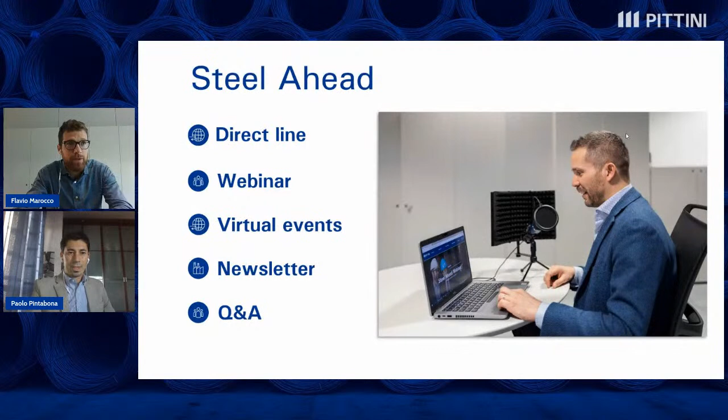Hi Flavio, and welcome everyone. Of course, with pleasure. Pittarc is the brand of welding wires produced by SEAT since 1972, a historic company of the Pittini Group, with about 80 employees working in the welding division, a turnover of 50 million euro per year, and a production of about 30,000 tons of consumables for GMAW and SAW processes.

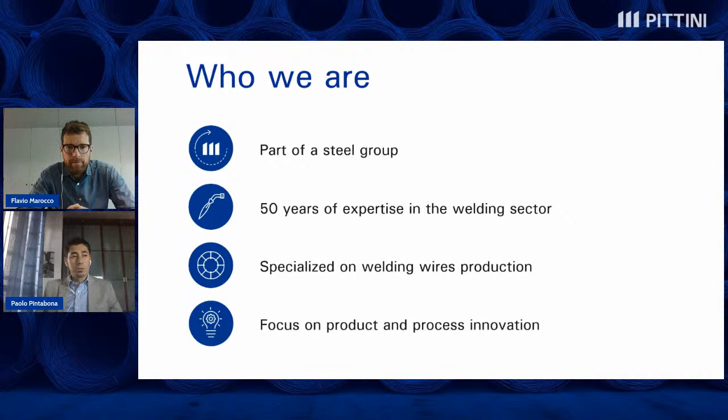In the Gemona del Friuli plant, we produce gas-shielded and submerged arc welding wires, which are the result of a production cycle that is controlled very carefully throughout all its phases, from the steel mill to the finished product.

To sum up, the production process requires the use of low-carbon wire rods, which are obtained from the billets manufactured in the rolling mills of the group. As a first step, the wire rod goes through a double cleaning process at the beginning of Pittarc production: starting with mechanical descaling, then chemical pickling by sulfuric acid, and then rinsing.

The manufacturing process starts from a 5.5 millimeter wire rod, and it is reduced to an intermediate diameter by the first drawing machine with dry chemical soaps, which help improve the cleaning and also the drawing speed.

Then an additional reduction is made up to the end diameter by the second drawing machine, using this time wet chemical soaps, before the possible copper coating at the end of the production line.

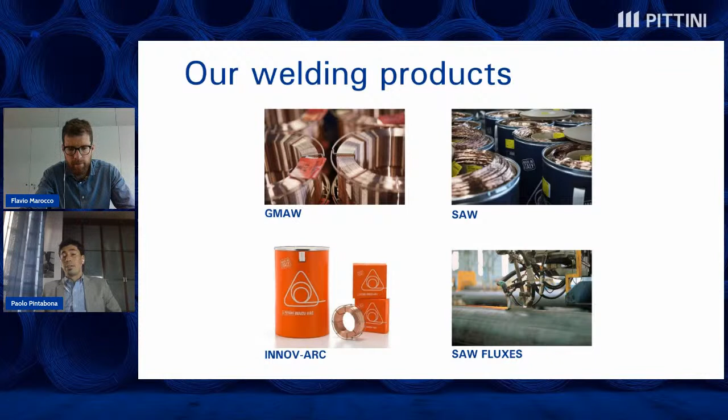Pittarc products are duly subject to strict checks of chemical, mechanical, and technological properties. They have the CE mark, and furthermore they have got the most important approvals from the main certification bodies, such as the Italian Registro Italiano Navale, the American Bureau of Shipping, the Dutch DNV, Bureau Veritas, Lloyd's Register, and the German TÜV, Germanischer Lloyd, and Deutsche Bahn.

Thanks to what has just been described, we can say that Pittarc has been present on the market as a brand leader for half a century, serving companies from over 50 countries in many different sectors, such as automotive, construction machinery, the agricultural sector, processing of metal sheet and pipe, and of course all kinds of metal work.

Okay, thank you very much for this brief introduction about Pittarc. You mentioned that you are part of a group, the Pittini Group, as a steel group. I want to know a little bit more about which kind of advantages you have from being part of this group.

Well, it's easy to say that of course there are many advantages. First of all, the synergy with the other companies belonging to the Pittini Group helps develop technology and plants of the latest generation. For this reason, we can supply high-quality products that can meet market demand, also in the most challenging applications.

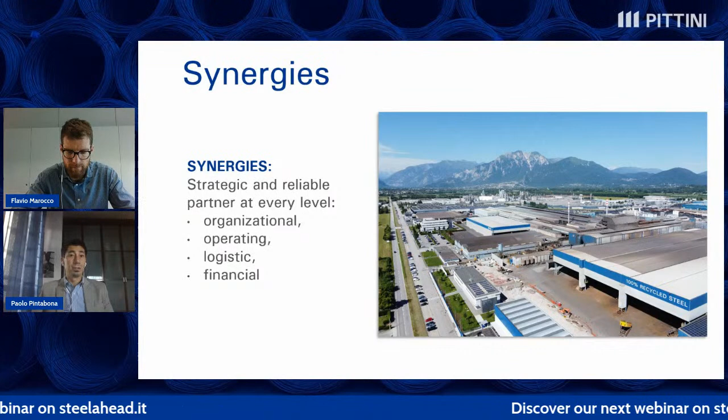Therefore, also from this point of view, the combination of the activities made in different labs and also the work between the different departments involved are made possible just by the intra-group synergies.

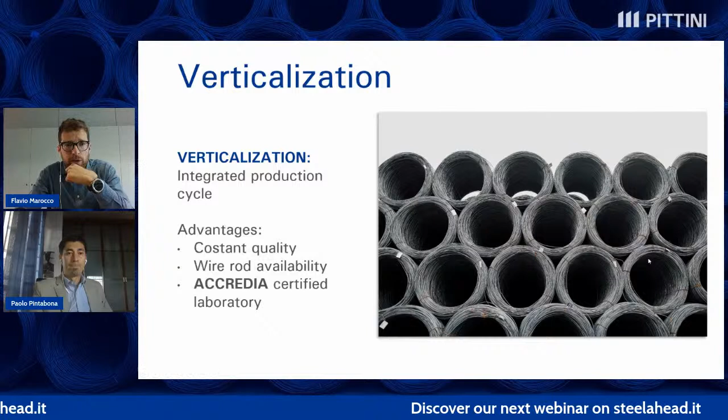So thank you very much about this. I will ask you to go directly on the topic of today's webinar. So let's speak about this collaboration with KTM. I want to know how it started and how it developed over the years.

Yes, thanks for the question. So Pittarc and KTM have been cooperating for almost 30 years through the representation of our distributor, Mr. Simon Wolfgang, a historical partner of Pittarc, with whom we always work with passion and constant commitment, making Pittarc welding wires well known and appreciated also by other important Austrian companies.

Speaking about KTM, the first supply is dated back to 1992, when at that time about 6,000 motorcycles were produced per year. Taking into account that about 0.33 kg of solid wires are used for each welded frame, the first supply was 2 tons over the whole year.

After then, KTM has had an exponential growth, from the 150 employees who made up the entire workforce in the Austrian plant, it has become a company structure counting on, for the first time, more than 2,000 employees in 2014, and able to produce in the following years more than 250,000 frames per year.

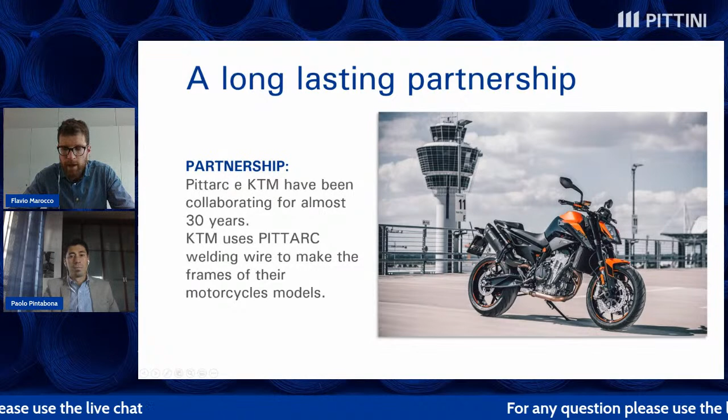Great, so a long story of collaboration between you two. But in specific, which kind of welding wires do you sell to KTM and are they using in production?

Well, let's start saying that in the plant area of Upper Austria, there is the welding division of Munderfing, having 28 workstations. Hence, the material that is mostly used is the Pittarc G6, so the SG2, in 250 kg drums as packaging and 0.8 millimeter as diameter.

Pittarc drums are placed in the dedicated spaces inside the robotic station, and the tubes that will shape the frame are fixed on a platform, which automatically turns up to 180 degrees, allowing in this way the robotic arm to carry out the automatic welding.

Once this phase is done, the manual welds are made by the operators, who in this case use the Pittarc G6 in 18 kilo spools with a diameter of 1.0 millimeter to complete the work with the necessary last tack welding. Our material is also very appreciated

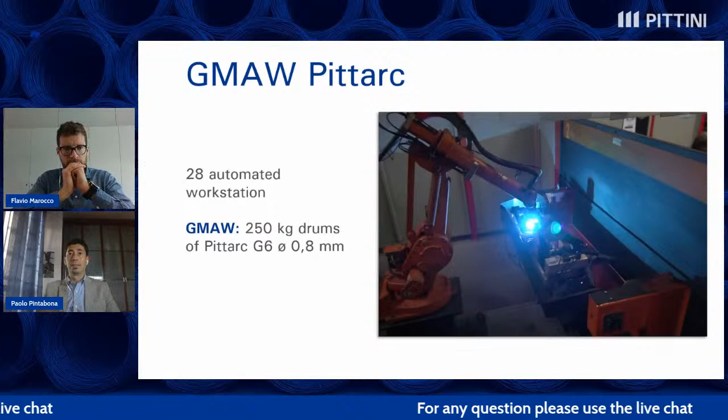in the welding process adopted at KTM, and I'm talking about the CMT, cold metal transfer, which is the innovative MIG welding method based on a short circuiting transfer process developed by the Austrian company Fronius for the first time in 2004.

During this kind of process, temperature variation in welds has important effects on material characteristics, because it is able to give time to the welded part to cool down before each drop is placed.

Moreover, CMT provides a control method of material deposition and low thermal input, and is also more efficient than the other MIG-MAG processes when the material is thinner than 10 millimeters, even up to 0.3 millimeters.

Welding wire is fed through the system that is controlled by a computer, and this computer can control the feed, the welding speed, and the amps going through the wire. This allows precise welding with no spatter, making a final result very clean and smooth.

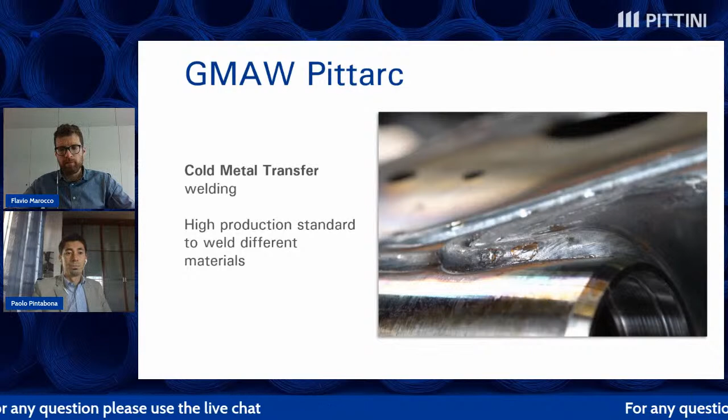Okay, so this part about the cold metal transfer is quite interesting, and I know that there are different technologies that are coming on these last years about advanced arc control welding like STT, SSA, but I want to know more about the welding wires and how Pittarc works to ensure a suitable wire for these new processes.

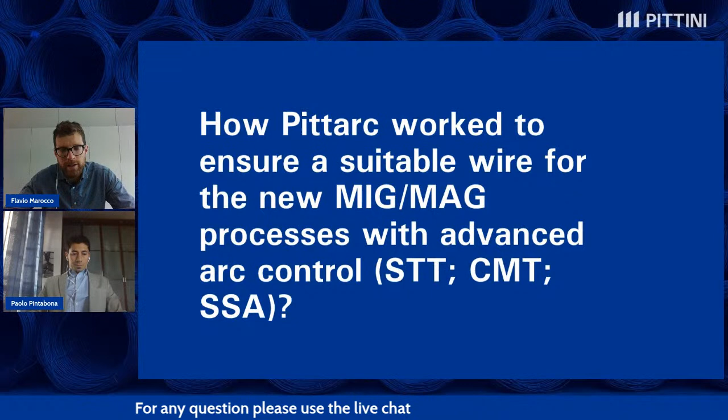Well, you're right, and as previously pointed out, Pittarc carefully carries out continuous checks on the entire production process in order to guarantee a product in compliance with the new MIG-MAG processes. The methods of testing the welding wires must include very precise checks by the quality control to ensure, for example, an advanced control of the arc during welding.

A whole characteristic set of the wire must be properly detected. I'm referring to the geometry, so the diameter, the ovality, helix, and cast must be controlled using the proper instrumentation. One check has to be done for the surface appearance, and in this case, the samples must not show bruising or stains due to oxidation or dark spots due to chemical soaps left over.

And concerning the copper-coated GMAW wires, the coating must be uniform and adherent to the surface, with the absence of cracks. A twist test is made as a proper control in this case.

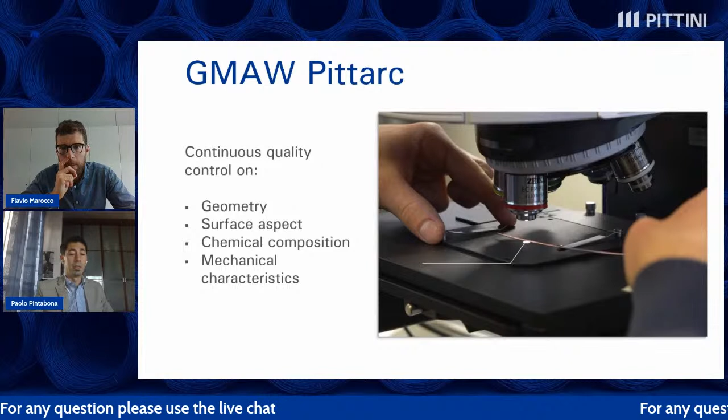I want to ask you, at the end of the day, with so many players in the market, why was Pittarc chosen for so long, and why still choose it?

Well, let me say that Pittarc is absolutely a proper and advantageous choice, since it represents a brand strongly signed by characteristics such as reliability and quality.

We are reliable because we have an international reputation, both in terms of completeness of the range of products, and also for the service offered to all the customers. And we are competitive from the quality point of view, and this is demonstrated by the high degree of satisfaction of the entire partner network of Pittarc, from the end users to the resellers and to the agents.

And they are satisfied because Pittarc wires are manufactured from low impurity and gas content wire rods, and they are able to obtain welding seams with excellent mechanical properties.

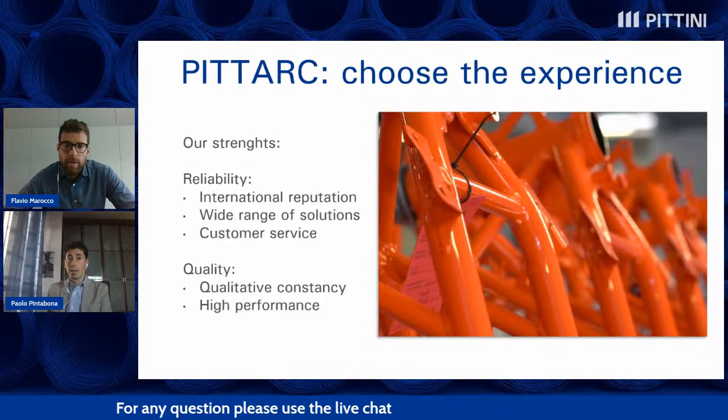KTM, as a leading company in its sector, must be focused on the concept of performance, and their ongoing research for technical improvements has therefore been linked over the years with the Pittarc brand. Without any doubt, the best for constancy in quality, technical assistance, and logistical reliability.